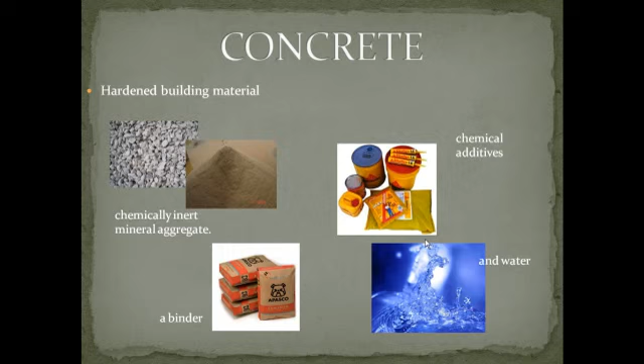Concrete process. Background. Concrete is a hardened building material created by combining a chemically inert mineral aggregate, usually sand, gravel, or crushed stone, a binder such as natural or synthetic cement, chemical additives, and water. Although people commonly use the word cement as a synonym for concrete, the terms denote different substances. Cement represents only one of several components in modern concrete.

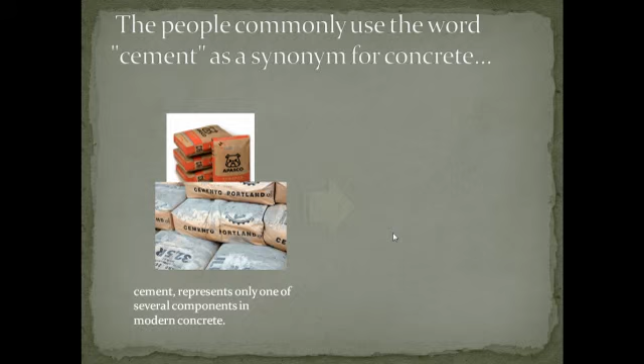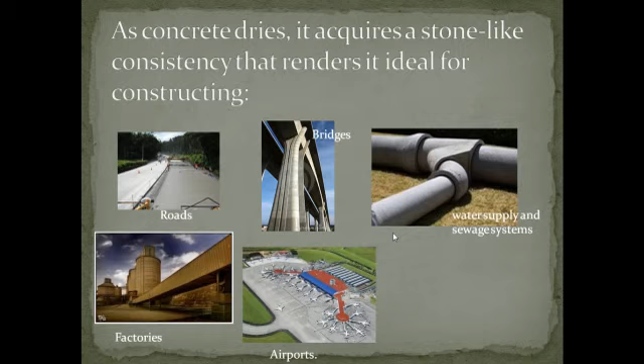As concrete dries, it acquires a stone-like consistency that renders it ideal for constructing roads, bridges, water supply and sewage systems, factories, airports, railways, and other structures.

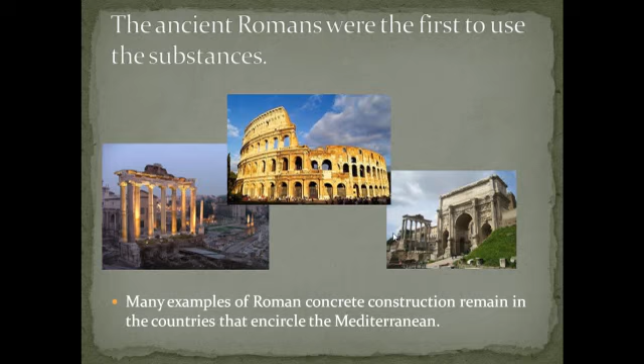The words cement and concrete are both of Latin origin, reflecting the likelihood that the ancient Romans were the first to use the substance. Many examples of Roman concrete construction remain in the countries that encircled the Mediterranean, where Roman builders had access to numerous natural cement deposits. Natural cement consists mainly of lime, derived from limestone and often combined with volcanic ash.

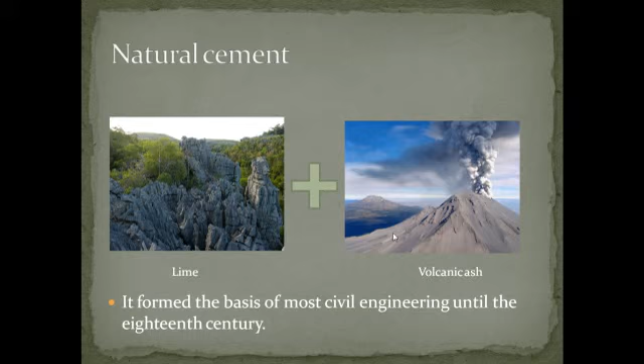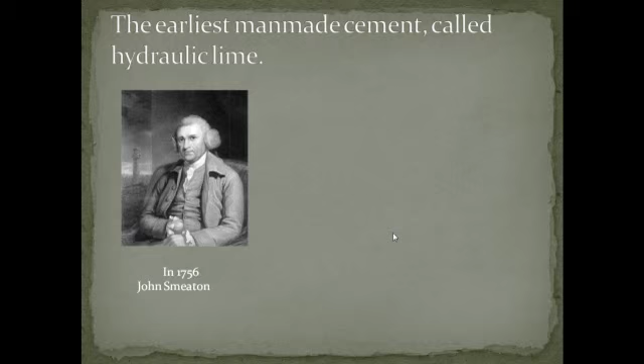It formed the basis of most civil engineering until the 18th century, when the first synthetic cements were developed. The earliest man-made cement, called hydraulic lime, was developed in 1756 when English engineer John Smeaton needed strong materials to rebuild the Eddystone lighthouse off the coast of Devon. Although the Romans had used hydraulic cement, the formula was lost after the collapse of their empire in the 5th century AD, until Smeaton reinvented it.

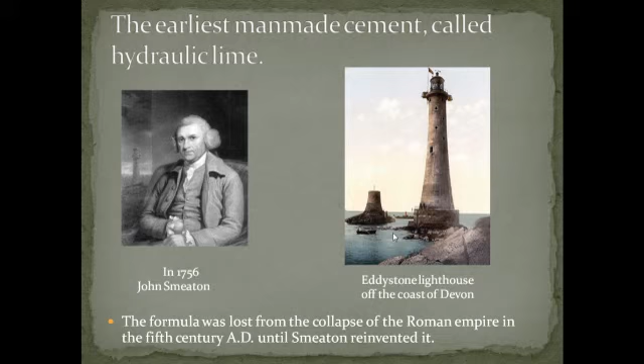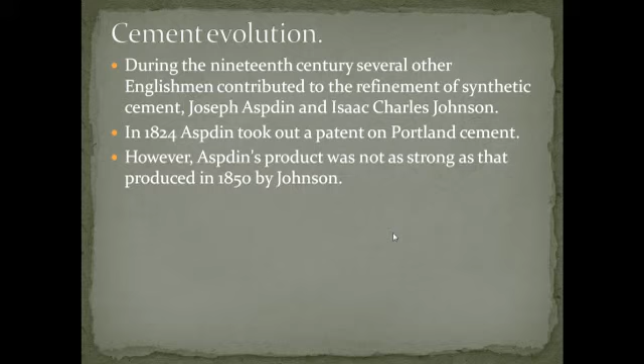During the early 19th century, several Englishmen contributed to the refinement of synthetic cement, most notably Joseph Aspdin and Isaac Charles Johnson. In 1824, Aspdin took out a patent on a synthetic blend of limestone and clay, which he called Portland cement because it resembled limestone quarried on the English Isle of Portland. However, Aspdin's product was not as strong as that produced in 1850 by Johnson, whose formula served as the basis of the Portland cement that is still widely used today.

Concrete made with Portland cement is considered superior to that made with natural cement because it is stronger, more durable, and of more consistent quality.

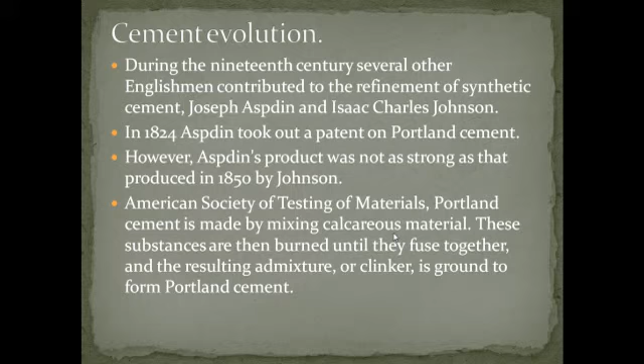According to the American Society for Testing of Materials, Portland cement is made by mixing calcareous material such as limestone with silica, alumina, and iron oxide containing materials. These substances are then burned until they fuse together, and the resulting admixture, or clinker, is ground to form Portland cement.

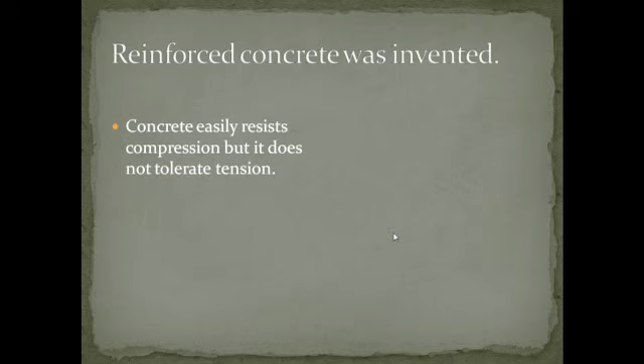After the refinement of Portland cement, the next major innovation in concrete technology occurred during the late 19th century when reinforced concrete was invented. While concrete easily resists compression, it does not tolerate tension well, and this weakness meant it could not be used to build structures like bridges or buildings with arches that are subject to bending action.

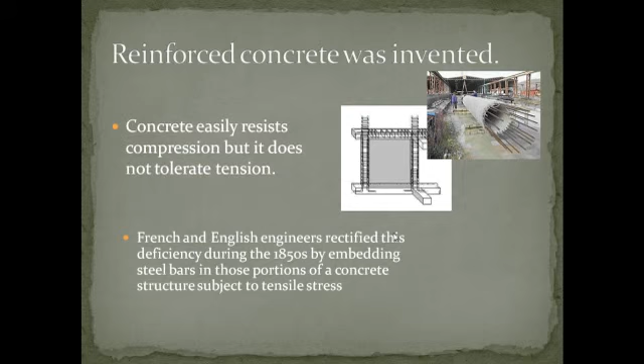French and English engineers first rectified this deficiency during the 1850s by embedding steel bars in those portions of a concrete structure subject to tensile stress. Today, different types of concrete are categorized according to their method of installation.

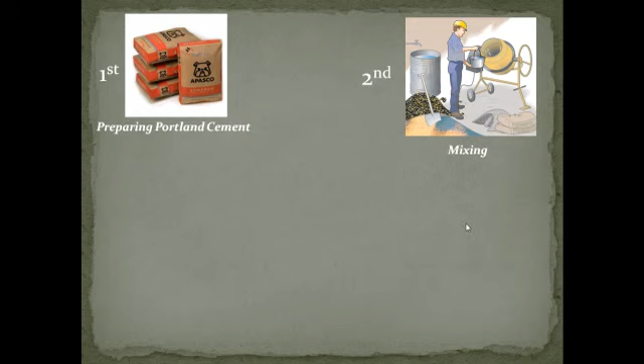The manufacturing process. The manufacture of concrete is fairly simple. First, the cement, usually Portland cement, is prepared. Next, the other ingredients - aggregates such as sand or gravel, admixtures, chemical additives, any necessary fibers, and water - are mixed together with the cement to form concrete. The concrete is then shipped to the work site and placed, compacted, and cured.

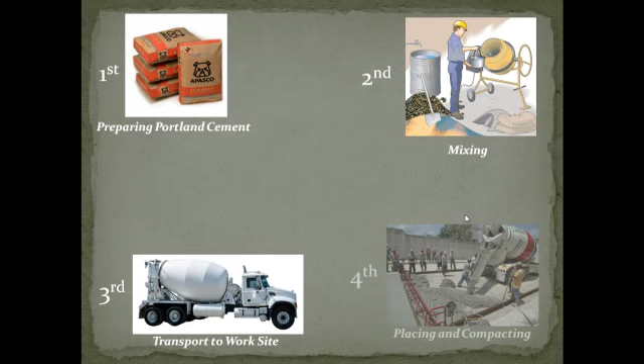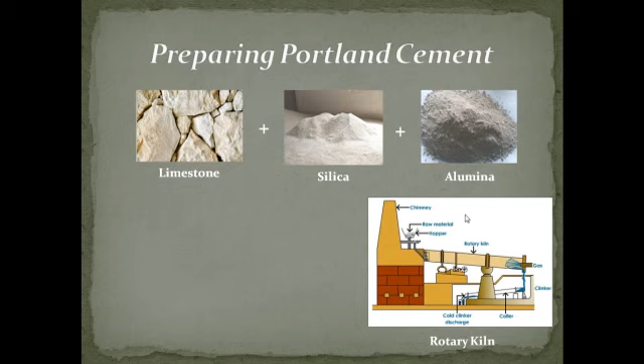Preparing Portland cement. The limestone, silica, and alumina that make up Portland cement are dried, ground into a very fine powder, mixed together in predetermined proportions, preheated and calcined - heated to a high temperature that will burn up impurities without fusing the ingredients. Next, the material is burned in a large rotary kiln at 2,550 degrees Fahrenheit. At this temperature, the material partially fuses into a substance known as clinker.

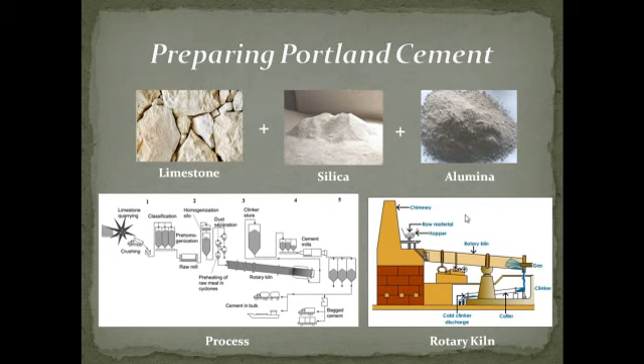A modern kiln can produce as much as 6,200 tons of clinker a day. The clinker is then cooled and ground to a fine powder in a tube or ball mill. A ball mill is a rotating drum filled with steel balls of different sizes, depending on the desired fineness of the cement, that crush and grind the clinker. Gypsum is added during the grinding process.

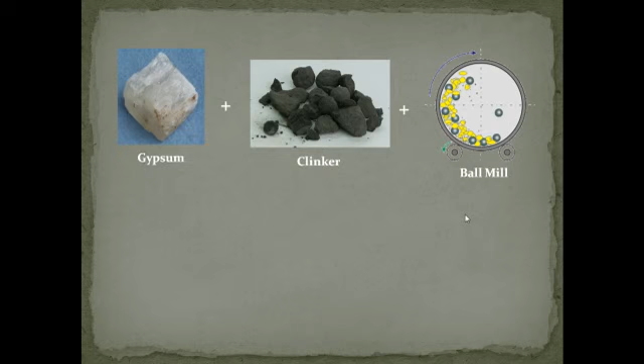The final composition consists of several compounds: tricalcium silicate, tricalcium aluminate, and tetracalcium aluminoferrite. The cement is then mixed with the other ingredients: aggregates such as sand, gravel or crushed stone, admixtures, fibers, and water. Aggregates are pre-blended or added at the ready-mix concrete plant under normal operating conditions.

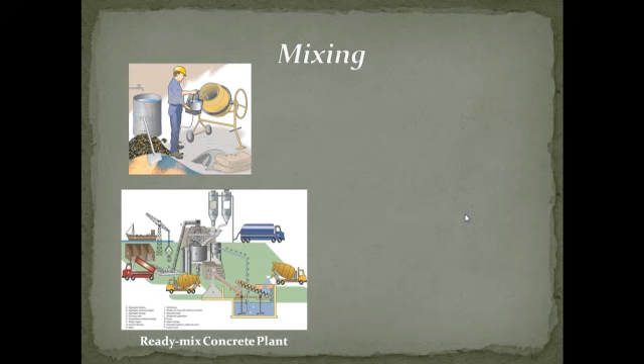The mixing operation uses rotation or stirring to coat the surface of the aggregate with cement paste and to blend the other ingredients uniformly. A variety of batch or continuous mixers are used.

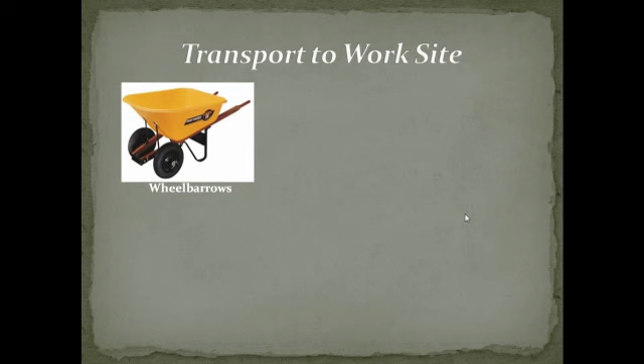Transport to work site. Once the concrete mixture is ready, it is transported to the work site. There are many methods of transporting concrete, including wheelbarrows, buckets, belt conveyors, special trucks, and pumping.

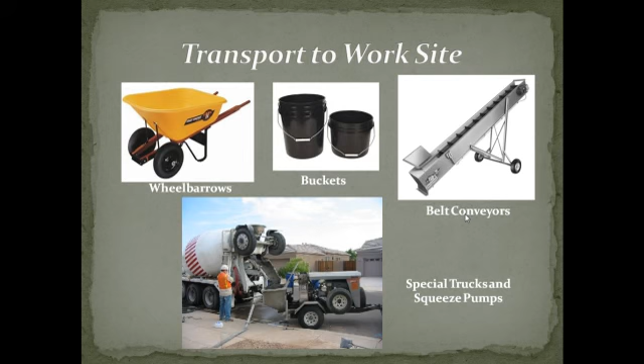Pumping transports large quantities of concrete over large distances through pipelines, using a system consisting of a hopper, a pump, and pipes. Pumps come in several types: the horizontal piston pump with semi-rotary valves, and small portable pumps called squeeze pumps. A squeeze pump provides a continuous flow of concrete, with two rotating rollers squeezing a flexible pipe to move the concrete into the delivery pipe.

Placing and compacting. Once at the site, the concrete must be placed and compacted. These two operations are performed almost simultaneously. Placing must be done so that segregation of the various ingredients is avoided and full compaction with air bubbles eliminated can be achieved. Whether chutes or skips are used, position is important in achieving these goals. The rates of placing and of compaction should be equal.

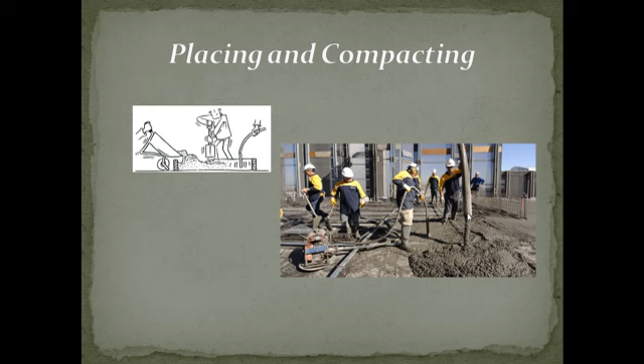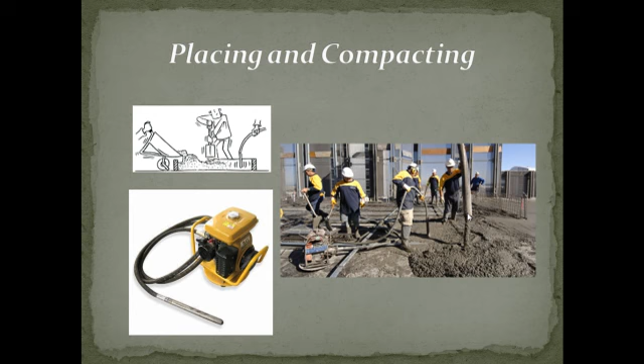The latter is usually accomplished using internal or external vibrators. An internal vibrator uses a poker housing a motor-driven shaft. When the poker is inserted into the concrete, controlled vibration occurs to compact the concrete. External vibrators are used for precast or thin in-situ sections, having a shape or thickness unsuitable for internal vibrators. These vibrators are rigidly clamped to the formwork, which rests on an elastic support. Both the formwork and the concrete are vibrated.

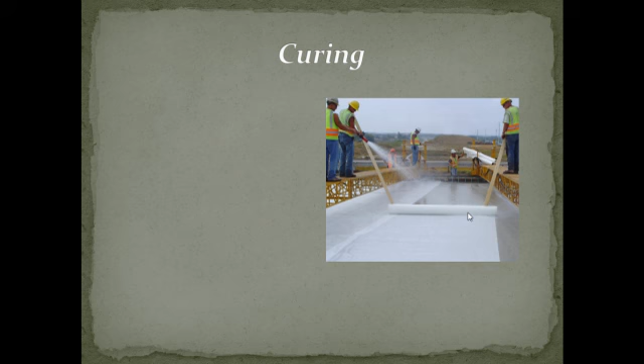Curing. Once placed and compacted, the concrete must cure before it is finished, to make sure it doesn't dry too quickly. Concrete strength is influenced by its moisture level during the hardening process. As the cement solidifies, the concrete shrinks. If site constraints prevent the concrete from contracting, tensile stress will develop, weakening the concrete. To minimize this problem, concrete must be kept damp during the several days it requires to set and harden.